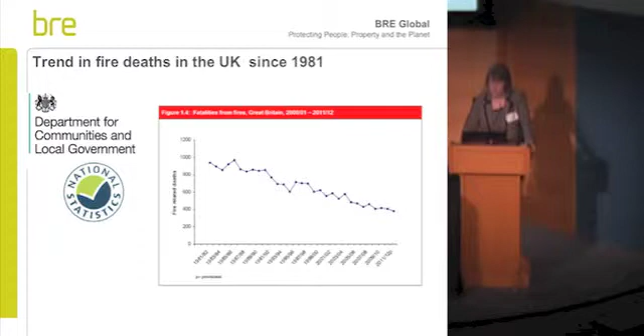However, there's never any room for complacency, and as I'm going to mention in a few minutes and other people have mentioned, there's many challenges ahead of us, many new things that are occurring that we have to be able to address. So what kind of changes, what kind of factors have occurred during that time? Well, obviously there's many interacting changes that have contributed to those statistics that I showed. But perhaps some of the key ones worth highlighting are firstly smoke alarms.

Back in 1988, the penetration of smoke alarms in the UK in the built environment was about 8%. In 2008, that was 86%. So that's quite a major factor in terms of alerting people to a fire to enable them to escape. And that's one of the key factors that has contributed to the trends that we have seen.

Another factor that has been spoken about in various fora in the past was the introduction of the furniture and furnishing regulations in the UK in 1988. On the back of a number of high-profile fires in dwellings where people were losing their lives because of the speed with which the fires were developing, and involved within that was upholstered furniture, the decision was taken to introduce more stringent controls on the fire safety of the furniture that we buy and put in our homes. So some test methods were developed, and all the furniture that you buy today has to pass these various tests.

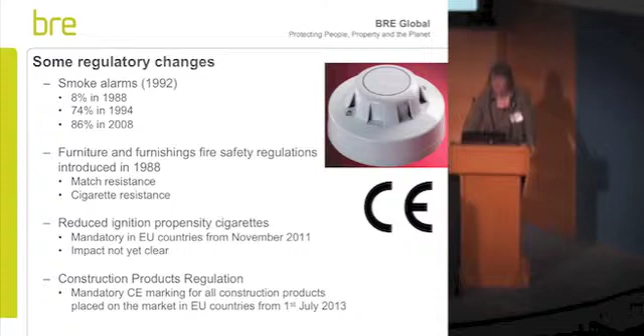So, our world then is changing, and it continues to change, and it will continue to change. We're seeing lots of changes in building technology. That's the way buildings are built, the materials that they're built from, and so on, as has already been spoken about today. We've moved away from more traditional types of construction, to more lightweight, easier, faster to construct systems and products. And the drivers for these are coming from non-fire related areas. Again, as mentioned earlier, the need to reduce energy consumption, reduce waste during construction.

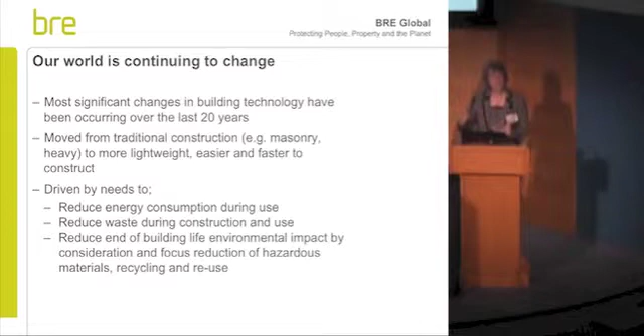There's a focus now on end of building life, environmental impact, what you do with a building when you deconstruct it, etc. Where are you going to dispose of it? Are you going to recycle some of the materials? Are you going to reuse them? All of these things are now coming to the fore and are being considered much more seriously.

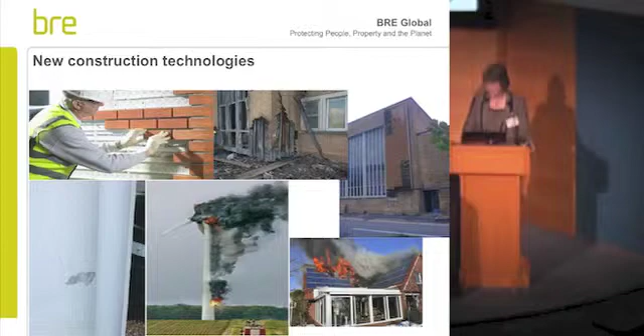So, what issues do we face now and going forwards? Well, with all of these new innovations, we don't have any historical database. There's no statistics that we can base any new regulations on or any new assessments. We're starting from a really low base of knowledge.

There's the possibility of systematic faults, poor quality of installation, use of new materials, in particular, and I think Barbara mentioned it, highly insulating combustible materials being used to reduce energy demand, new test methods for benchmarking, new requirements for air tightness in buildings, levels of safety and property protection that we have no benchmark for, and then the possibility of disproportionate damage. Very small fire incidents can result in quite significant property damage and business continuity issues.

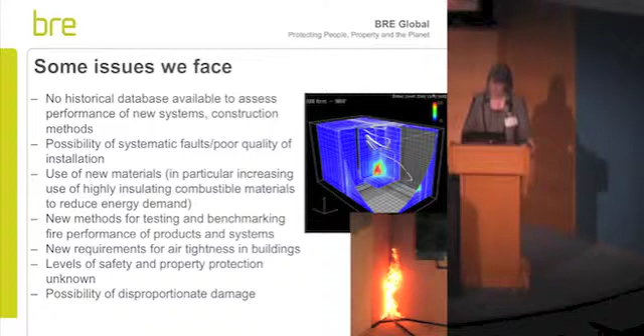With U values, and the U value is the metric that's used to characterise the insulation performance. So for those, the U value was 0.8 to 3. The current building regulations in the UK now require U values between 0.16 and 0.28. So significantly greater levels of insulation for which we have no data at the moment. So one question is, are the design methods that we're using relevant to the types of buildings that we're now building and constructing?

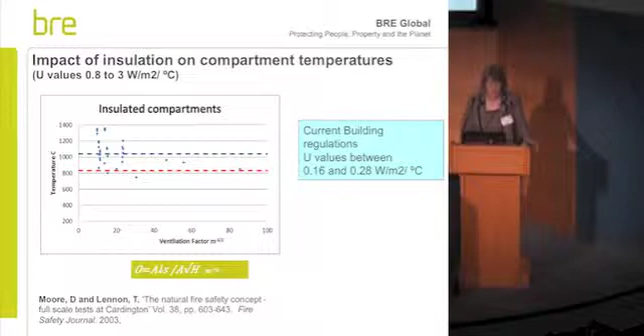So, opportunities then in relation to research. We shouldn't see these things as blockers and negative things.

We have the background and the tools that we need. I think you've heard about the developments in the modelling and the means of testing things as systems. We have the means to assess the impacts, support the innovation and resolve the challenges that they are facing and they are posing to us. We need to be looking at maintaining and improving the safety levels. We also have to focus on reducing fire losses from property damage and business interruption.

What I'm going to show now is just a very, very quick overview of a case study of some work that we've recently undertaken, which is looking at treating the fire safety issues in a holistic way. We're looking now at assessing the sustainability contributions and aspects in relation to fire and fire performance. So we've considered within this study things including the environmental impacts, the societal impacts of fire, and the economic impacts.

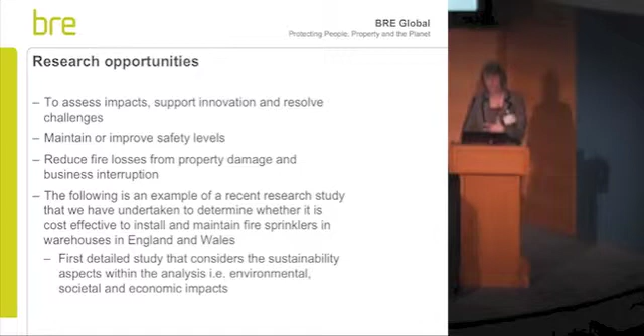And given all of those factors, you're not just looking at the life safety, you can then look at things like the property damage, the business interruption content, and you can start to assess the costs and the benefits of different fire protection options that are available to you. So this particular case was for sprinklers in warehouses. So Lou spoke about the work that FM are doing with warehouses.

This project was funded by something called the Business Sprinkler Alliance in the UK and involved a lot of key stakeholders and data from a number of different sources. And it set about to consider both the environmental impacts and monetary costs and also the whole life cost benefit analysis for installing sprinklers in different sizes of warehouse.

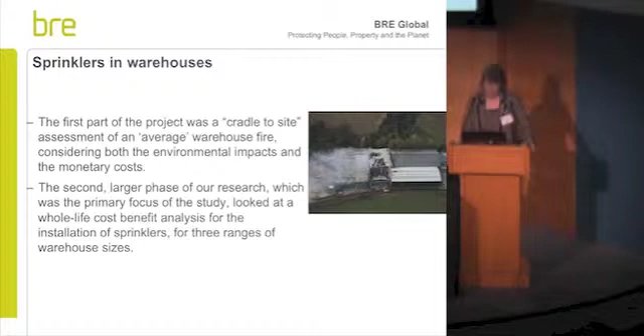This was quite unique in that this was the first time anybody had tried to do this. There's life cycle analysis tools that are routinely used in certain sectors for assessing sustainability, but they've never been brought in and used in conjunction with the overall assessment of fire and fire performance.

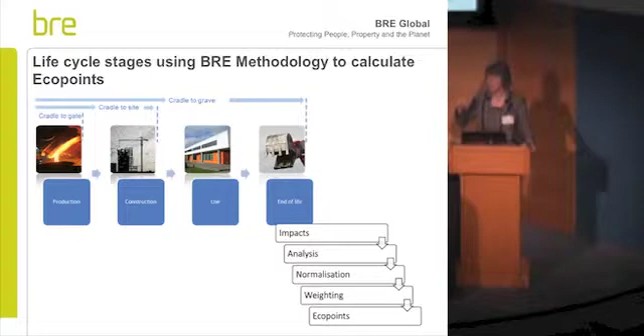So initially, our colleagues who are experts in this area undertook a cradle-to-site analysis of the warehouses, the model warehouses that were chosen for the study, and looking at the installation of sprinklers within those. So with that, you go through a process of assessing the impacts, you analyse, you normalise, you weight, and then you convert it to something called an Ecopoints value.

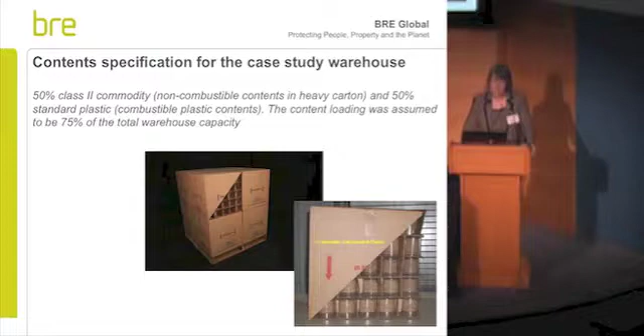So what then happens is that data is then taken and is looked at also within the context of the fire. If you had a fire in a warehouse, you then look at the impact that the fire would have on the environment. So in the case where you have no sprinklers, obviously the environmental impact is greater, and then you pick up the benefits from having a sprinkler system. Obviously that is true in the cases where you have a fire.

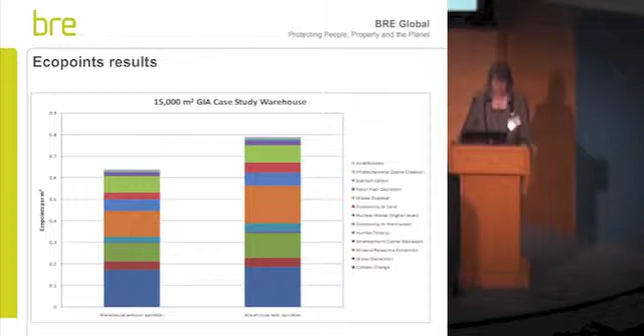The other part of the analysis into which that analysis fed was the whole life cost-benefit analysis. And for that, we looked at 3 different sizes of warehouses. The frequencies of the fires were estimated, and they were estimated from the statistics that were available, both in the UK fire stats, and also we worked very closely with the insurers, looking at their data and their databases to give us the loss information in terms of monetary values, which extended to business continuity, etc.

The one thing that came out of that is it's very difficult. Lots of people collect their own statistics for their own purposes. Nobody ever stops to think, does this data set talk to this data set? How easy is it to correlate them? And a large part of the work involved in this project was trying to unpick the data. Even when you knew you had a major fire in a major location on a major day, to try and correlate the 2 databases and get some meaningful data proved extremely difficult.

And you might say, well, that just sounds stupid. I mean, it sounded stupid to us. But I think a lot of lessons have been learnt, and hopefully going forwards, that's one area that will be addressed. We can have some common interpretations of data, we can start to have some common formats, and we can start to make this type of analysis much more routine and simpler.

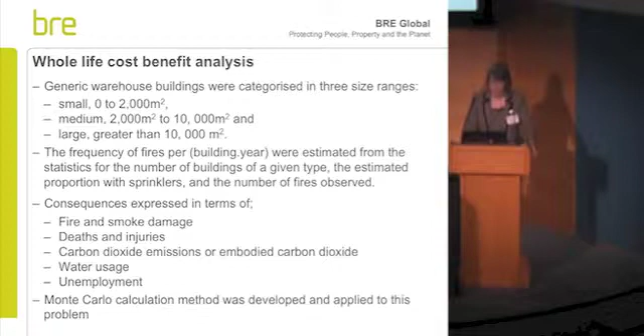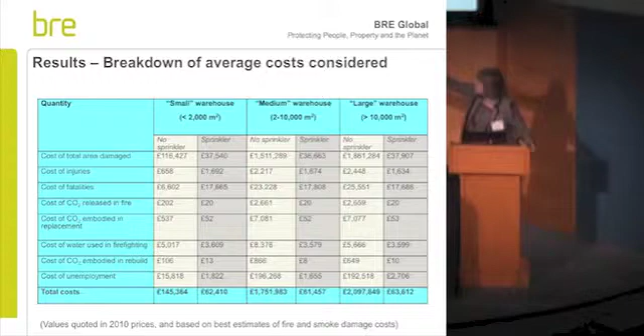applied to the problem. So very quickly then, in summary, the results from this study. The important thing to realise here is these are average costs across the whole of the warehouse range for that particular size, and you can see that for the small warehouses the costs are greater for no sprinklers. So that's the bottom line here in blue, the total costs. Okay?

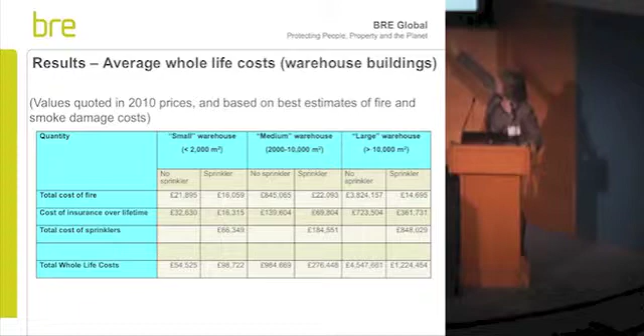So the whole life costs, and this is where it's averaged over 45 years, which is considered to be the lifetime of the sprinkler system. You then start to see where the benefits are, and you can see that the total whole life costs along the bottom for the smallest warehouse size, it's not cost effective to install sprinklers within those buildings. But for the other two sizes of warehouse, it is cost effective to install sprinklers.

So one of the questions that then follows from that is, why then do we not change the building regulations? Why do we not make that a requirement? The answer to that is nobody or very few people actually die or get injured in fires in warehouses. It's about property damage and business continuity. So this data is available in the public domain, and it's a decision that is taken by the building owner, the occupier and the insurance company to decide whether they want to invest that money for the benefit of their business going forward.

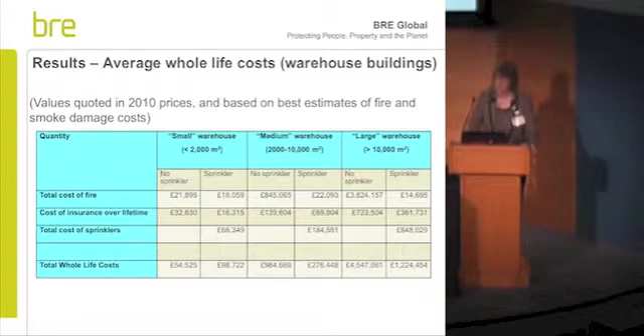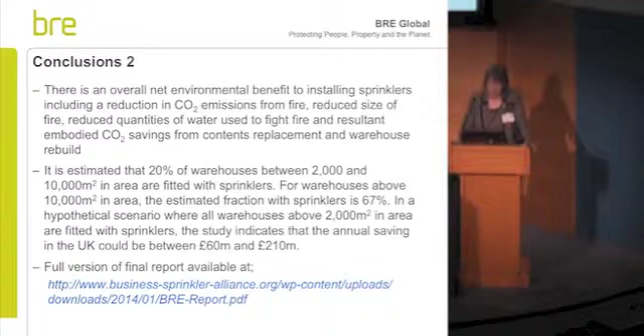So finally, just bringing this now round to a conclusion in terms of what we do and why I'm here, I guess, today. It's important that we invest collectively in solving the fire protection problems, and the best way to do that, obviously, is through research and through collaboration. No one organisation or one individual can solve the world's problems on their own.

And in 2003, BRE set up our first University Centre of Excellence here at Edinburgh, the BRE Centre for Fire Safety Engineering. And that is funded by the BRE Trust, who owns BRE and what was the Fire Research Station. BRE Trust is a charity with a mission to promote and support excellence and innovation in the built environment for the benefit of all. And it does that through supporting research and education.

They've provided the funding to support the Chair of Fire Safety Engineering here at Edinburgh, the first incumbent of which was Professor Jose Torero, and now very pleased that Albert Simeoni has joined the team here as the follow-on chair. We've also funded 12 PhDs to their conclusion during that period of time, and the reason the Trust is doing that is they see these as the next generation of leaders in the field going forwards.